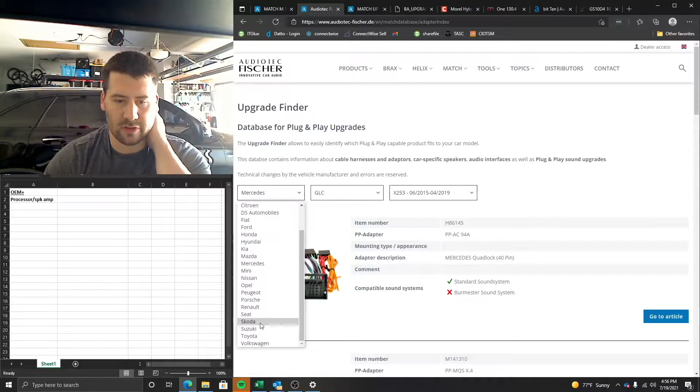So our processor, which in this case is also an amplifier - we would use this Match M5. Audiotec Fischer makes this kind of OEM plus gear for a variety of European cars. They support Audi, BMW, Fiat, Honda - I guess they have a lot of different cars, not just Europeans, but they're pretty popular in the European space. There's a dealer here nearby that I can get the products from. They make a 5-channel and a 7-channel DSP, so we would do the M5 DSP, which is $750.

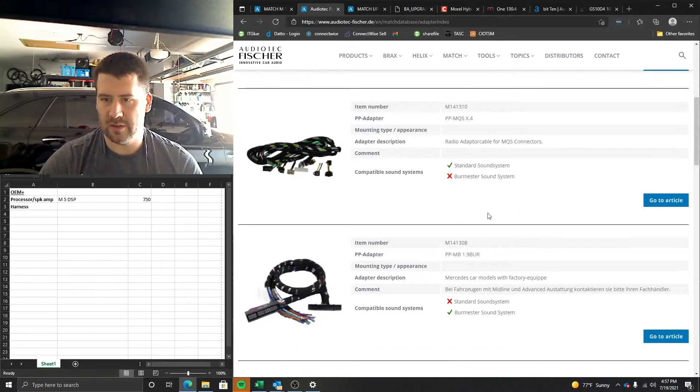We would need a harness to connect that to the car. If you go on their website and check out this upgrade finder, you can see what fits my car with a standard sound system. This one was standard, this one with Burmester, etc. Then there's speakers and other stuff here, which we'll get into next. In my case, I would use this guy as my harness. The 1.4 is 1 meter, and they have a 2.4 which is 2 meters - different lengths. This guy's $150.

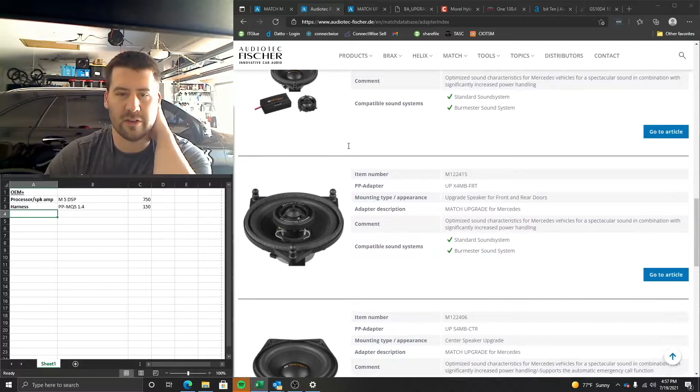Then speakers - I've got a lot of different options when it comes to speakers. Sticking with the OEM Plus and having something that would be easy to install, Match makes components that drop right into the front door, so that's what these guys are. Factory tweeter location, factory woofer location, there's a crossover that goes in the door, and everything is made to be plug and play. This is the part number for this guy, and I got a price on that last week - it's $250.

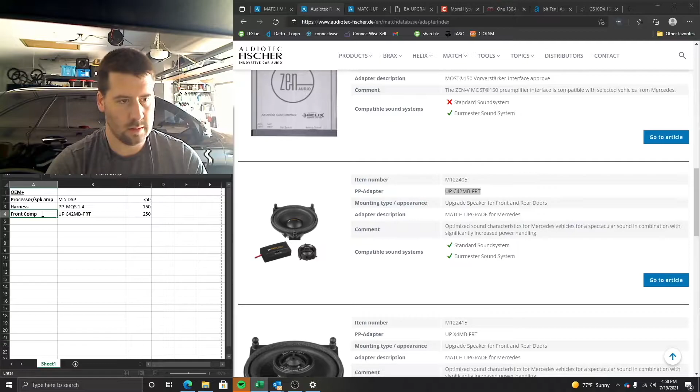Then if we wanted to do rear speakers, they have a rear speaker option, which are these guys here, and those are $190. So I've got our rear coaxes, and these are $190.

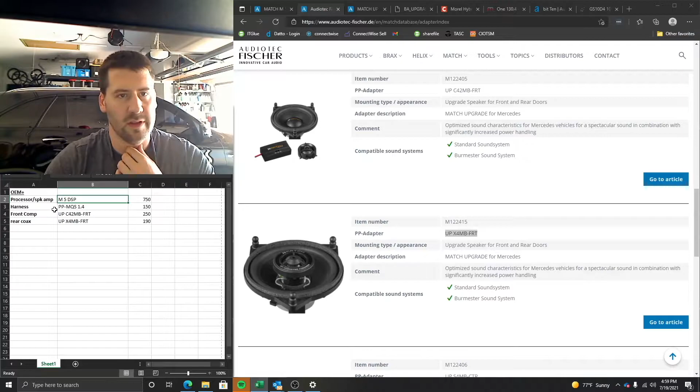Now this DSP is already an amplifier, so that would run the speakers - powers the speakers physically. For the subwoofer, there are factory subs in the car - well, there's one factory sub. You can add a second factory sub because there's a factory location. If you had the Burmester system, you would have 2 subs to begin with. So you could put these in there and amplify them. Let's throw that in there just to show what they are.

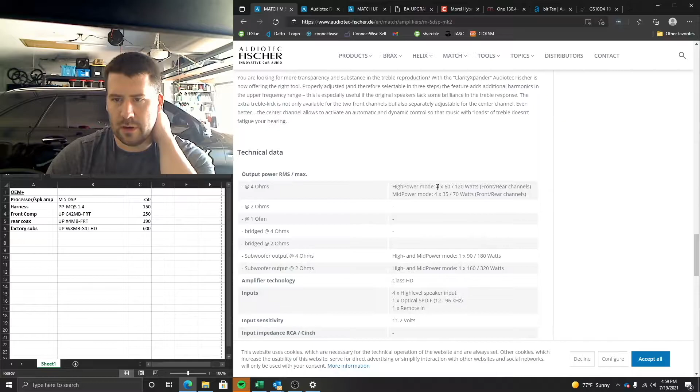Interesting. It's high and mid power, so the high power must be this guy, and then the 2 ohm output would be this guy.

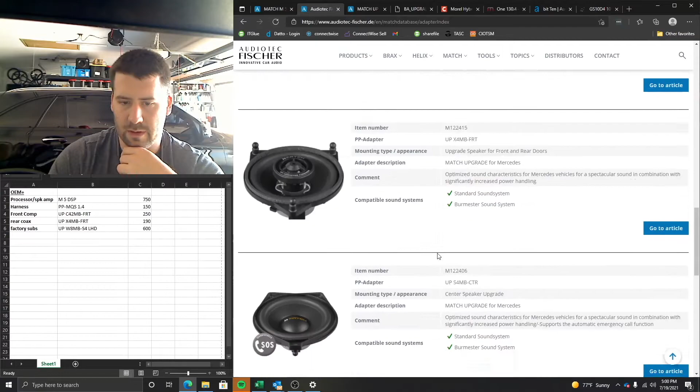So looking at the subwoofers, where are they? Right here. They are cool. I think Crutchfield has these. We'll see if there's more information there.

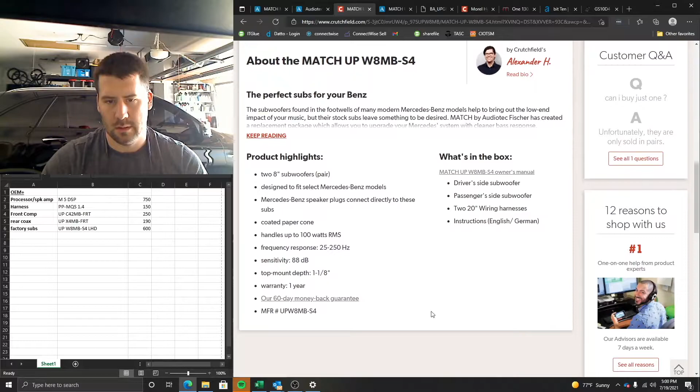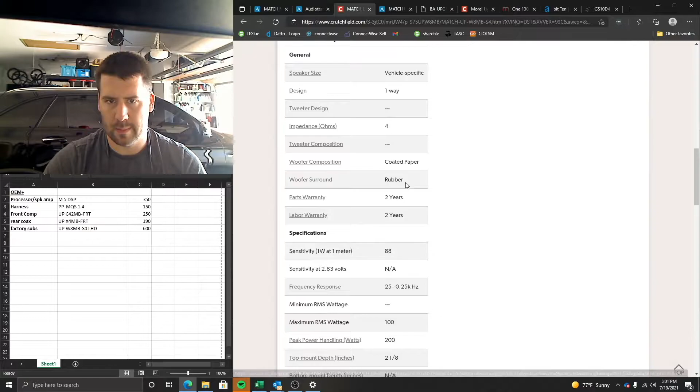Alright, so it doesn't say what the impedance is, if these are 4 ohm or 2 ohm. Oh, 4 ohm, okay. So if I wired 2 of them in parallel, I would end up with 2 ohms, which means that the amplifier would run them with 320 watts. So that probably is enough.

So that's really it. You end up with a processor, a harness to plug it in. It's all plug and play. You drop front components in, you drop rear coaxial speakers into the factory locations, you upgrade the factory subs, and this kind of does it all. Our total is $1,940. Now let's talk through an aftermarket setup, kind of like I've had in the past.

Alright, so: processor, speaker amp, and really there wouldn't be any wiring needed for the OEM-plus option because it's all built into the match.

So this would have front components, you have rear coax, we would have aftermarket sub, amp, wiring.

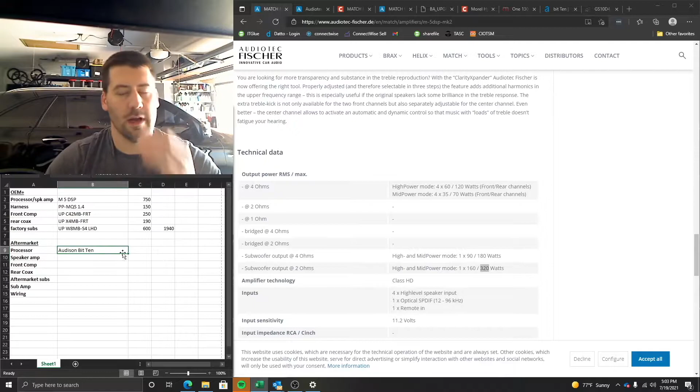So what I've used in the past is an Audison Bit Ten. There are a lot of other options - you can do like a Mosconi 6 to 8, you can do a variety of different things. The Bit 10 is a good processor. It works really well. I think there's a new version of it now because they got bought by Hertz, so I think this is rebranded as something different now, but it's been around for a long time and it works fairly well. I've had good luck with it in the past and they're easy to tune.

So this, if I remember right, was around $350 when it was new. For a speaker amp, I currently have a Mosconi One 130.4, which is this guy - so it's 130 watts by 4 at 4 ohms, or 350 by 1 bridged. And this guy would be $800 new.

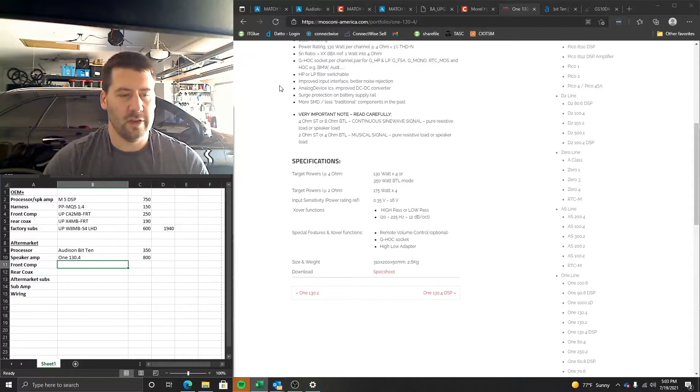Front components - so there's a couple different options here. A lot of people are doing these Morel Hybrids in the Mercedes. They're $750 for the pair. There is also a Focal 100, it's like an ES100K. I think that's them - yeah, these guys.

So a lot of people are doing these, but the people that have done these that have also tried the Morels like the Morels better because they have better low end bass, and it makes sense. I mean, these show a frequency response down to 50 hertz. The Focals show a frequency response down to 110 hertz, and the Focals tend to be a brighter speaker in general. So we'll put this in here as

ES100K / hybrid. They're both $750, so either way, that's what you'd end up with.

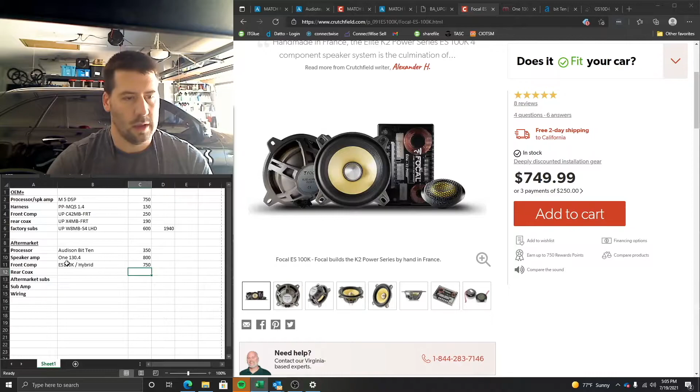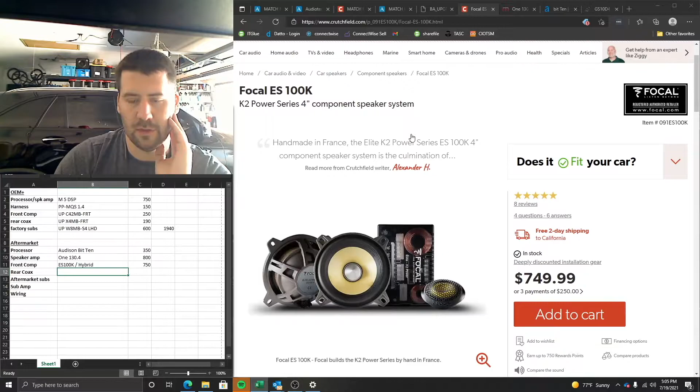Rear coax - in this setup, I don't think that I would do rear speakers at all. You can do something like a 4-inch Morel, like these Tempo Ultra Integras or something like that if you wanted to. These Maximo Ultra Coax - there's a couple different options here. I wouldn't go crazy with rear speakers because they're in the back, and oftentimes you don't have passengers, it's poor imaging, so we'll do like these Maximos, we'll put those in there just as a placeholder.

So we'll say 170 for those. Now, aftermarket sub - so the aftermarket sub that I currently own and would definitely buy again is this GS10D4 from AudioFrog. I have a D2 though, but same thing - mine's just a dual 2-ohm instead of a dual 4-ohm.

So this guy is a $350 sub, and then there's some sort of box needed. So we'll do $450, add another $100 for a box.

Okay, next we need an amplifier to drive the sub. I'm using an Alpine PDX-M6. A functionally equivalent model that's current would be about $600. They make a 750 watt V series now, so that would work just fine.

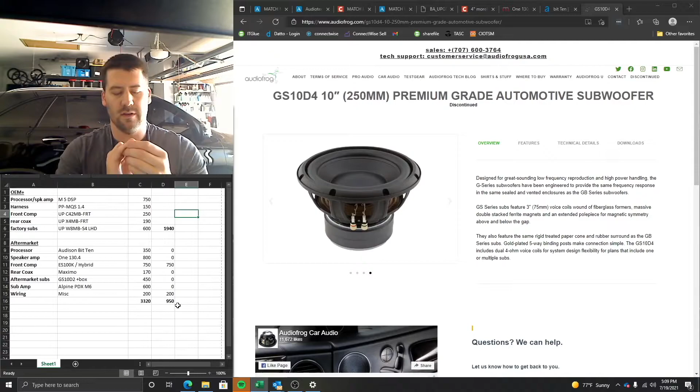Now in this car, I don't think time alignment's going to matter a lot between the woofer and the tweeter, because the woofer and the tweeter are right next to each other. They're very, very close to each other in the door. In my GLK, my woofers were down in the kick panel or down in the bottom of the door, and the tweeters were up high in the door, so there was a fairly decent difference in distance between the woofers and the tweeters to your ears.

So this is kind of what I'm looking at. Now, I do have another option as well, which I'm thinking about. If I decide that I want to go fully active with my speakers, what I can do is I can go with AudioFrog. Now, AudioFrog actually makes separates.

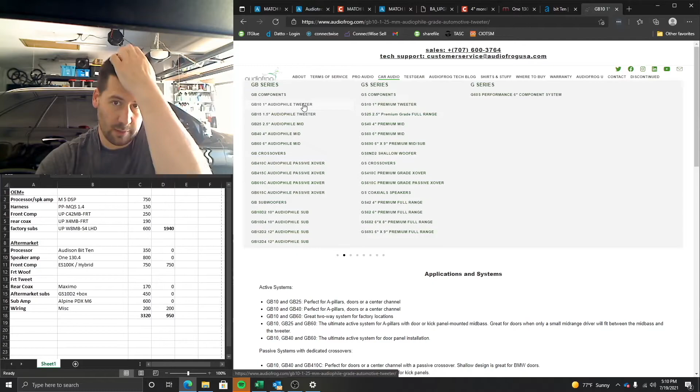So if we go to car audio and we go to, so they have tweeters. They have a 6-inch, oh here, let's just go here. So they have a 6-inch mid, a 4-inch mid, a 2.5-inch mid, a 1.5-inch tweeter, and a 1-inch tweeter. So I've got a couple different options there. So I would probably stick with the GS series, which would give me a 1-inch tweeter, this GS10.

And this guy is 219. And then I could use those as my tweeters, and then as a woofer, they have a 4-inch mid, this guy. So I could use this as a 4-inch speaker. So this is a GS40.

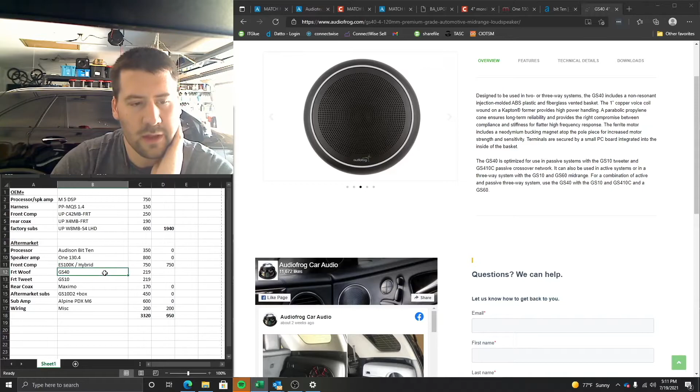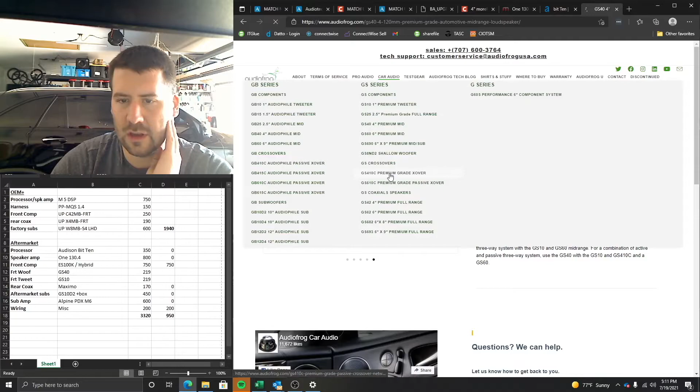That's also 219. Now the difference between this setup here and these is that these are components without a crossover. If I decided that I wanted a crossover, then I could buy this GS410C crossover, which would give me a crossover and the ability to feed them from one channel of an amplifier. So this is designed exclusively for the GS10 and GS40. And that's like another 219 bucks too.

So it ends up being like $660 for the AudioFrog versus $750 for the Morel Hybrid. I really like AudioFrog. I've been very impressed with my component set, or sorry, my subwoofer that I have. So I think that I would purchase them again.

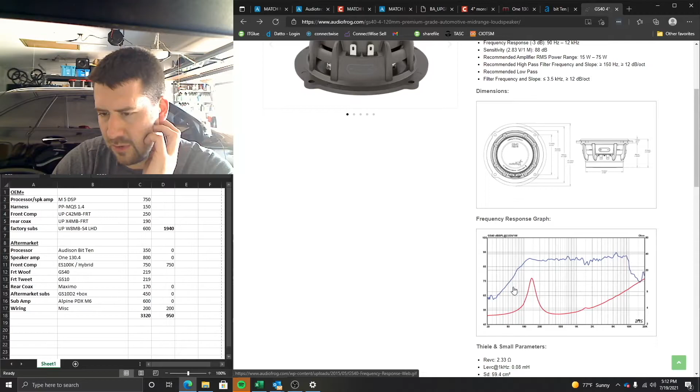Now looking at the technical details, the frequency response on this one is a little higher. So it starts off at 90 Hertz, so it's lower than the Focals, but it's definitely higher than the Morels. So I would lose a little bit of low-end punch on the AudioFrogs, potentially. That being said, not all of these are measured the same, but it looks pretty clear that I'm going to drop from about 90 decibels down to about 73 decibels, which is huge, going down to 50 Hertz. So my 90 Hertz is right here, which is my 3 decibel roll off.

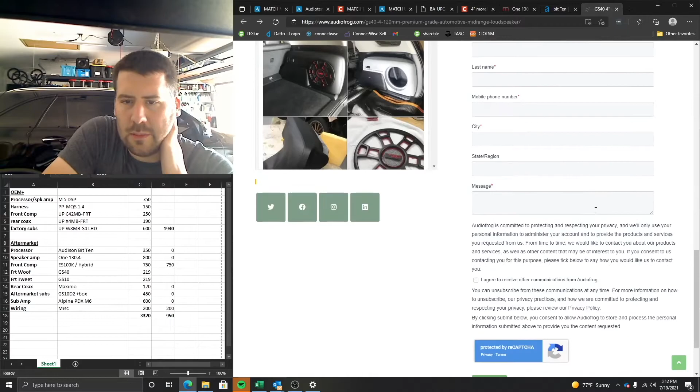I'm not sure exactly how these are going to sound compared to the Morels, but it is definitely an option. These are about 440 bucks versus 750 bucks if I run them as fully active. So I could do that as well.

If I don't do these, then that ends up totaling - let's do this, Excel do math for us - 638 bucks is what I'd be into the system for. So that's really not too bad.

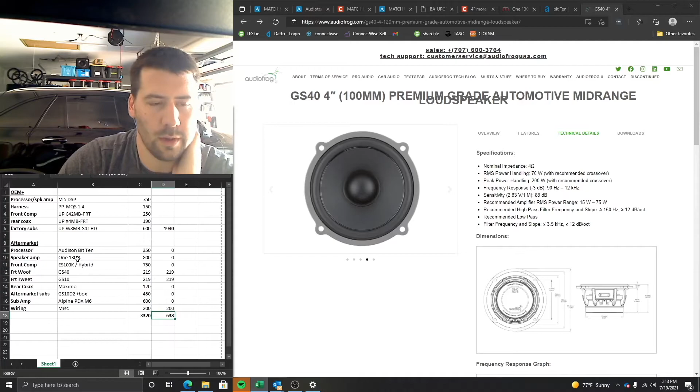Now I'm using a lot of hardware that I already had, like the Bit Ten, the amplifier, and it could be argued that if I went this route, I could sell the One 130.4 and the Alpine PDX-M6 and the subwoofer and the Bit Ten and all of the other stuff.

And this contains rear speakers while this one doesn't, but I really don't think that the rear speakers are going to be necessary, and I don't think I'm going to miss them at all. I haven't missed them in my last 3 cars, so I don't expect to in this one.

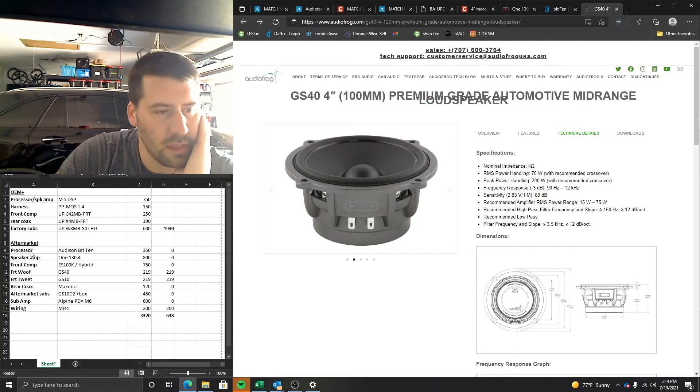So I don't know, I'm going to have to figure out what I want to do. I think I'm going to go the aftermarket route, and reuse my Bit Ten, my One 130.4, because there's just very few unknowns there. The other thing is I could actually use these speakers, these UP C42MB-FRTs in this set.

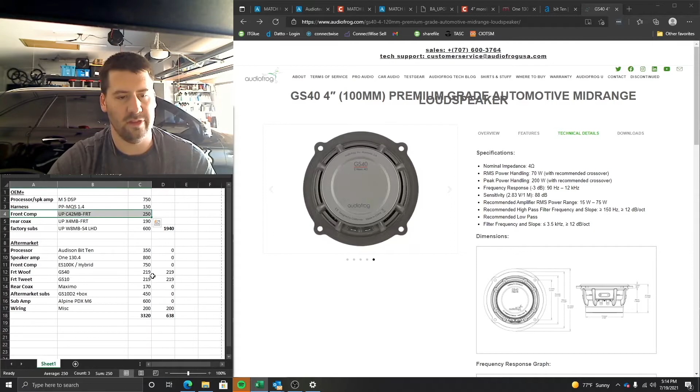And it would only be $250 for the front speakers then. So that is also an option too. So these guys here - see if this, yeah - so these are 90 to 25K, and they support 60 to 120 watts. So that's kind of an interesting option.

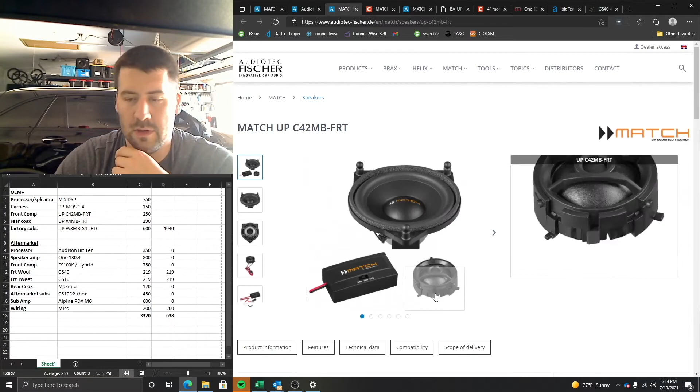I could use these, and I could use the crossover or not use the crossover. I could run them as fully active off of my 4-channel amp, or I can run this crossover with them. I could technically use my 4-channel amp to run my sub with its other 2 channels, or I could make it run the factory subwoofer that's up in the kick panel.

I could do something with that potentially. So I have a lot of different options here and some things that I need to think about, but this is kind of what I'm trying to figure out - get everything ordered, and make sure that I'm only doing this once.

So I think the best option is for me to go with a full aftermarket setup. I can do some videos on the tuning and adjustments of that. It'll be usable in future cars rather than the match and the harnesses and stuff like that, which are kind of dependent on specific European vehicles.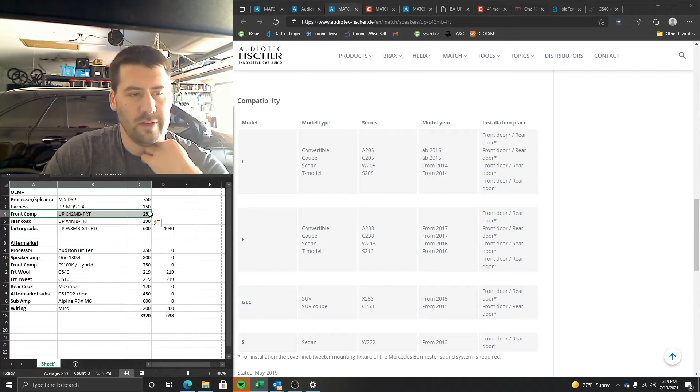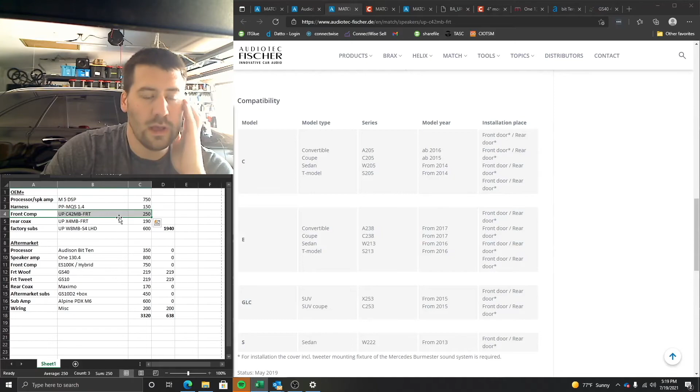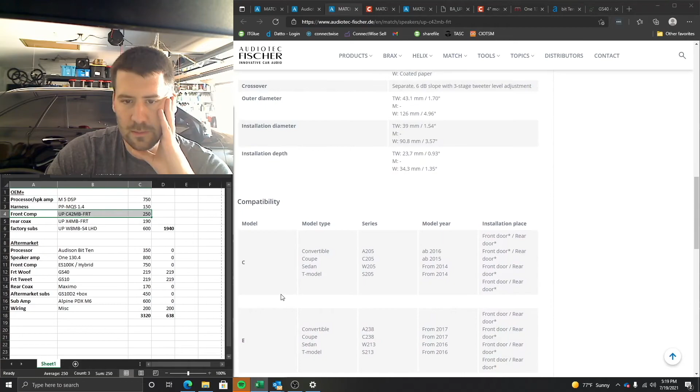The front components, these match speakers, while they're way less expensive, they're only going to be compatible with these few cars - the C-Class, the E-Class, the GLC, and the S-Class. That is it. So if I move to something different, then they're not going to drop into my new car.

Whereas something like the Morels or the AudioFrogs would potentially be able to be used in other vehicles as well. So this is kind of the planning process I'm going through. I'm trying to figure out what I want to do. My next video, I'll show what I chose.

We'll talk about wiring, what's needed, how we're going to cable it, because there's different cabling requirements for all of these different options. And then we'll get all of that ordered, and I'll do some videos on the installation and the tuning, and kind of some last thoughts.